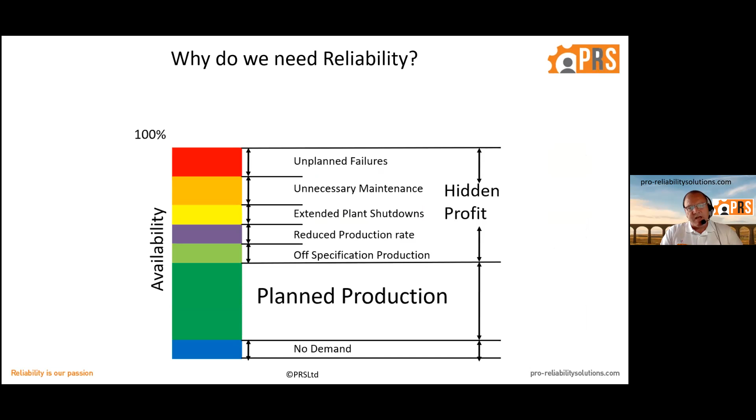So why do we need it? In a 12-month period we have 8,760 hours to maximise our plant availability. And what we're looking at in asset management, focusing on the reliability of the assets, is really digging into what we call the hidden profit. We're trying to maximise availability by minimising the risk of failure. Are we doing maintenance that shouldn't be performed? Are we doing shutdowns that are being extended unnecessarily? Are we having production quality issues? What we're trying to do is really dig into that hidden profit, to optimise the cost and the risk as well.

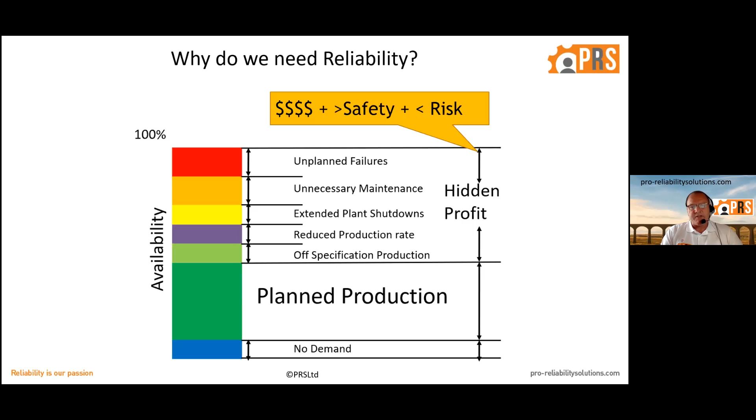And manage the risk associated to the asset. Where does unreliability come from? This comes from a benchmarking study from a number of years ago. Quite often when we're working with customers, reliability is seen as a maintenance activity. But what we're trying to do is understand that some of the issues that we're suffering may actually be inherent within the asset itself.

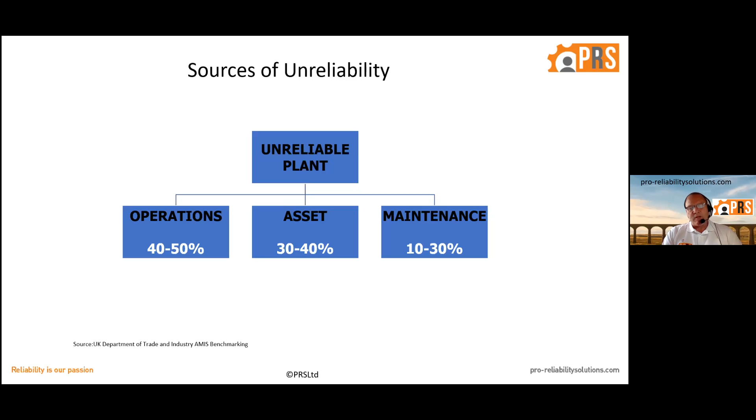And also, how are we operating the assets? Are we operating them within their design envelope? Or are we trying to get a few more thousand widgets per hour out of the machine when it wasn't actually designed to do that? And so you can see the ratios of unreliability there. If we only focused on the maintenance section, we are still going to see some unreliability from the production line. So it's understanding that reliability is not just a maintenance activity.

So what is an asset? People look at assets. It can be a piece of equipment. It can be a copyright. It can be land. It can be buildings, and it really is a thing or an entity that has value. That description comes from ISO 55000, which is an asset management standard. It is understanding what an asset is before we start to do the asset strategy optimization. Generally, we're focusing on the equipment, the production lines, and the machinery inside a company.

So what is the optimization? It really is about balancing the cost against the risk. Looking at the overall asset, the production line, it might be a single piece of equipment, it might be the full factory, and doing a risk analysis and balancing that cost. As we get to the case study, you'll see how that eventually comes out. From ISO 55000, asset management is referred to as the coordinated activity of an organisation to realise value from assets. That's what we're doing with asset strategy optimization, getting the value from the assets and balancing the cost against the risk.

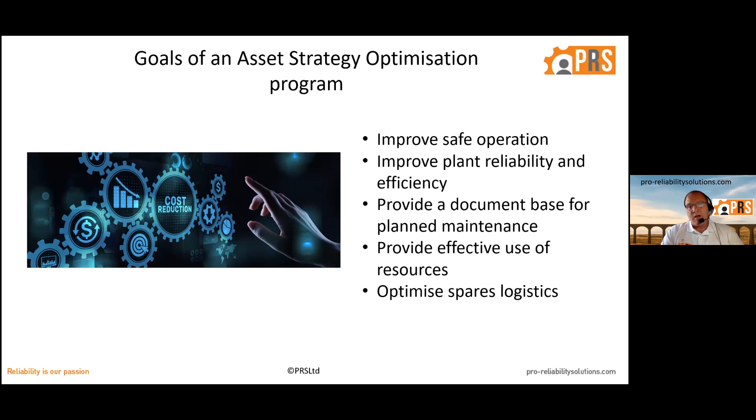So the goals of the programme, there's a number of them that we tend to look at. We certainly need to focus on the safe operation. We need to improve plant reliability and efficiency. The Asset Strategy Optimisation Programme will provide a document base for planned maintenance, and also look at the resources that we're going to need and what spares we need to deliver the strategy. Some customers may have other requirements as well, but generally those are the key ones that we're focusing on.

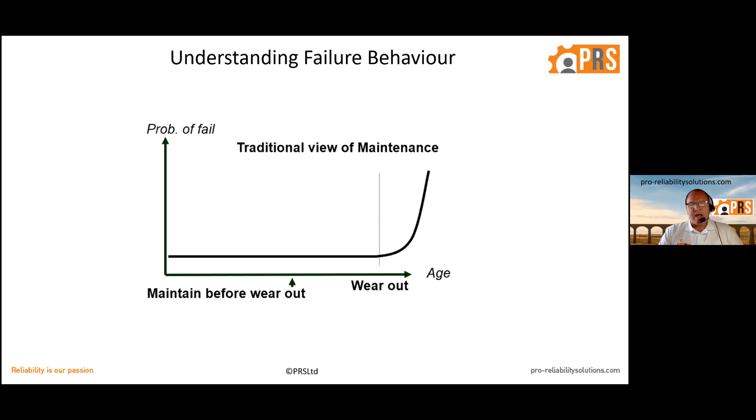As we start to look at the assets, one of the starting points is to understand how the assets are failing and where they fail within their life cycle. A traditional view of maintenance is that we install a piece of equipment at day zero and it runs for a period of time, and at some point in the future it starts to wear out. Providing we do maintenance before it reaches the wear out phase, we should get the maximum life out of the asset. Unfortunately, not all items reach the wear out zone, and we often suffer from infant mortality or early life failures.

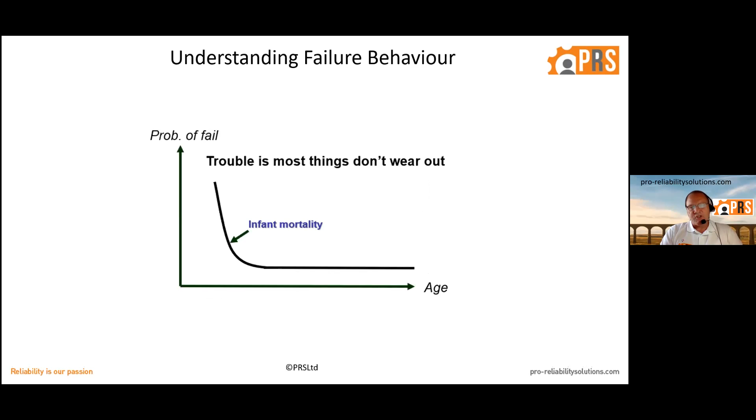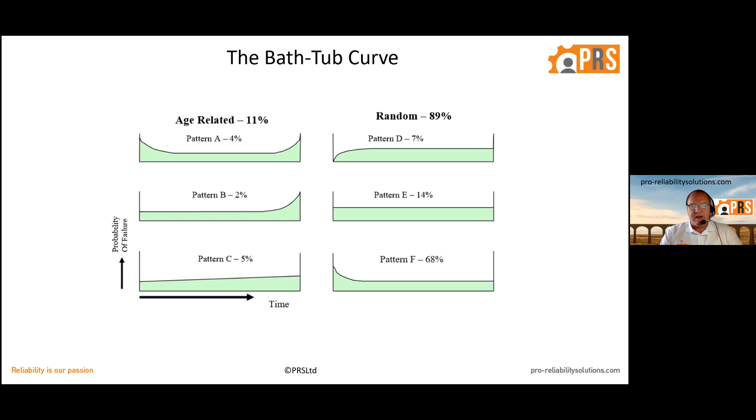So being able to understand how a component inside an asset is failing helps us optimise the overall strategy. If anybody's heard of the bathtub curve and Weibull analysis, this is what I'm referring to here. There are actually 6 zones of the bathtub, and what's important as we're doing the analysis is we look at the failure history, we do the analysis, and, as I'll be showing in a moment, perform Monte Carlo simulation and predict what we're likely to see in the future based on past events, and understand how the components are failing within this bathtub curve.

It really is the attention to detail that's needed. We need to get down to the assets. We need to understand the failure modes and how they are failing. Some of the failure modes will suffer from infant mortality. Some will be random failures. Some will be wear outs. My job as the reliability engineer is to get down to that level of detail, get to the failure modes, and put in place the optimum strategy to prevent or detect a problem occurring. That's the maintenance strategy. We're either trying to prevent the failure or detect it before it happens.

There may be some failures that are left as run to failure or no scheduled maintenance, but for me that decision is only made as part of the asset strategy optimization approach. Ultimately we need to design the maintenance task and align it to the failure mode that we are expecting to see or have already seen in our history files. So it really is attention to detail, getting down to the failure modes and understanding how they fail in terms of the life cycle and the bathtub curve.

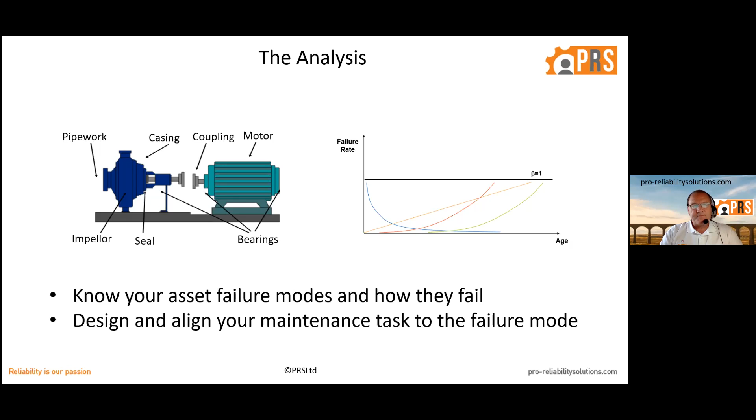If anybody's followed reliability-centered maintenance in the past, RCM, there are a number of different RCM standards. SAE JA1011 defines the process, and there are 7 questions. And if we follow these 7 questions in sequence, then we should be able to determine if a suitable task, or a suitable maintenance task, can actually be applied.

So this is going through looking at the functions of the asset, the functional failures, what are the failure modes, what are the effects upon failure and the consequences, and then what mitigating activities or mitigation tasks can be implemented and how frequent should we implement those tasks. So those 7 questions under the RCM banner help us drive our assets towards a point of optimization.

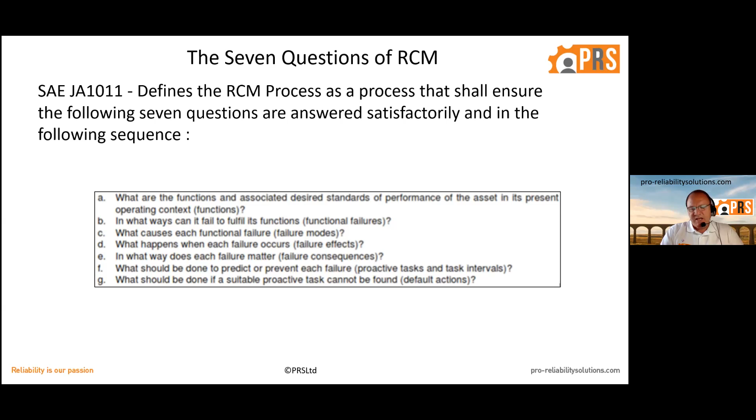What is a failure? Any unplanned interruption to the operating equipment or systems in delivering the desired performance is a failure. And what reliability methods are actually aiming to do is forecast those failures through understanding the likelihood of occurrence over a period of time. So as we get down to the asset, down to the failure mode level, we're really trying to understand how often are we likely to see this failure mode occur over a set period of time, and ultimately what mitigating activities are we going to put in place to prevent those failure modes from occurring.

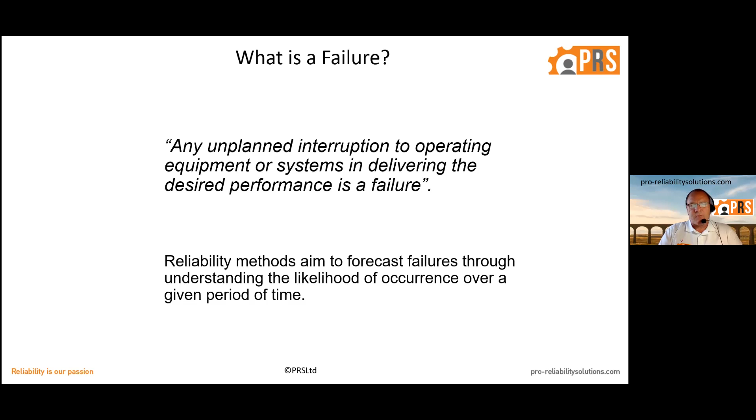So it's a question that we ask customers: how does reliability impact your business? And these are generally the responses that we get. We can look at higher maintenance costs. We can look at lower plant availability. We can see an increase in reactive or breakdown maintenance, and that is often related as well to an increase in safety incidents. We can look at quality non-conformances and an increase in capital spend. So those are often the 6 common answers that we get when we ask that question, how does reliability impact your business?

And so with this asset strategy optimization approach, by taking a structured approach, what we are looking to do is actually flip these on their head and really get hold of the strategy and the costs and the risks associated to any potential failures.

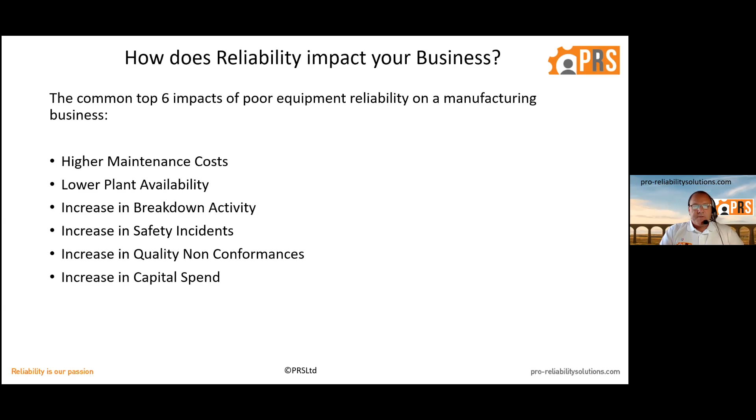So one of the steps that we look at with customers is, have we done a criticality analysis? Where are we going to focus our effort? And criticality analysis is really about understanding where are the most critical down to the least critical assets within the business. Some of you may have already done this. We have customers who've got well-documented criticality analysis programs in place. We have others that have not yet done it.

And so it's something that we try to help guide the customer, because we don't want to be putting all of our effort into some of the assets that aren't having an impact on the business in terms of the cost and the risk. So let's focus on the things that are going to hurt us the most, and define a program for applying the asset strategy optimization.

So some of the things that the criticality analysis often covers are the customer impact, the safety, risk, impact on production. Have we got any single points of failure within the production line? What's the history telling us on this particular asset? Do we carry spare parts? And we look at probability of failures. But it helps us understand the asset structure and where are the critical elements within our business.

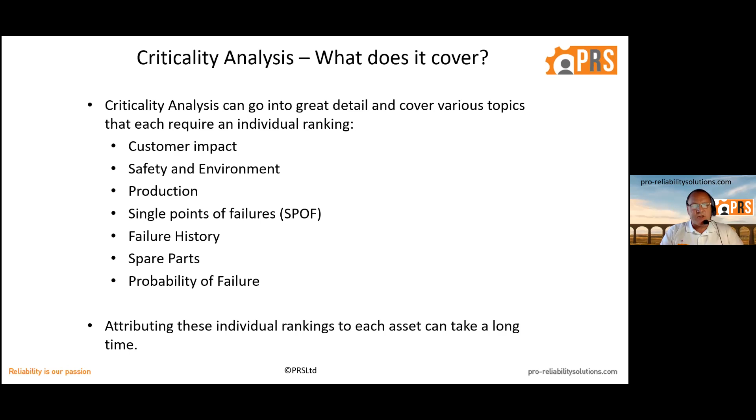So having that critical list, the output is often an ABC type ranking, or it could be a 1 to 5 ranking. There may also be safety critical elements, or in some companies we look at critical control points, where the maintenance is really non-negotiable. It might even be mandatory activities that we have to perform, and they will just come out at the top of the tree anyway through the criticality analysis.

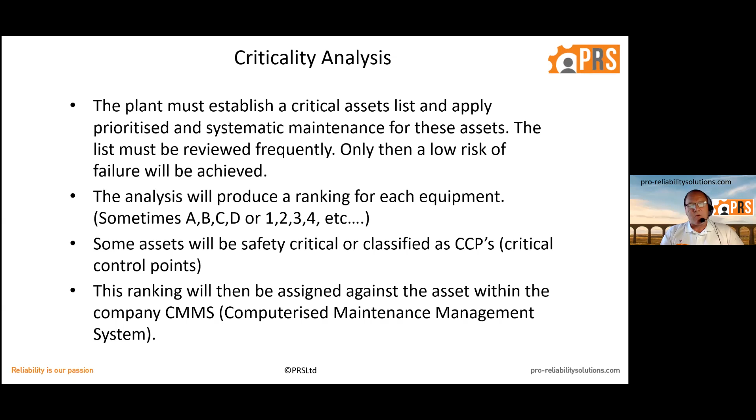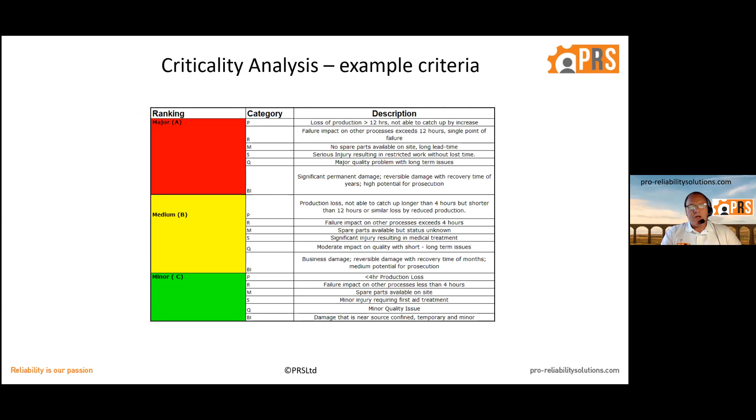And once those criticalities have been identified, then we look to ensure that those criticalities are assigned against the asset within the CMMS system. There's a simple ranking there of an ABC, and in each category you can look at impact on production, plant reliability, maintainability, safety, quality and business impact, and we can take those criteria and do a simple analysis, looking at the A's, B's and C's, and then making sure that we focus in a little bit more detail on the criticality A's.

When we do it in this approach, generally what we find is the ABCs, we generally find a split of 20% A's, 40% B's, 40% C's. It's usually that kind of ratio, but again, that varies on the production line, and if you've got duty standby redundancy built in, that can also influence that number. But generally, it's around a 20-40-40 split.

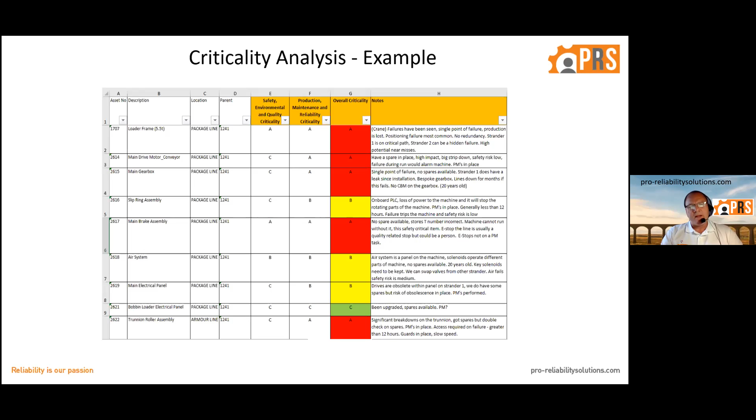What do we do then with that criticality? I've already mentioned we can put the numbers in the CMMS system, and that can also help with the prioritisation of your work orders within planning and scheduling. Some companies use something called a RIME index, where the criticality number is taken into account and helps planning. It can help with your budgeting discussions. It can also help you understand where we need to put our reliability and maintenance efforts.

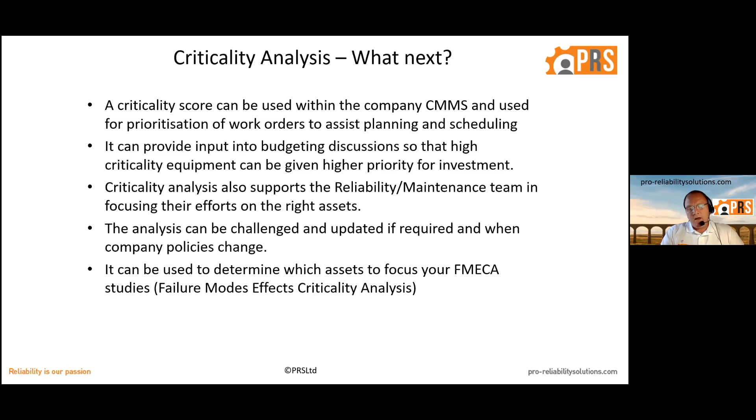And then the next thing down at the bottom there, it talks about which assets are we going to do the asset strategy optimization on and focus the FMECA effort. And that's really where that criticality analysis is leading to now. So we're moving from the high-level asset criticality down to what we call the FMECA, which is a failure modes, effects and criticality analysis. And what we're now going to do is drill down to the asset, identify the failure modes, understand the effects upon failure, and then what can we put in place to mitigate those particular failures. So we're moving down into the FMECA.

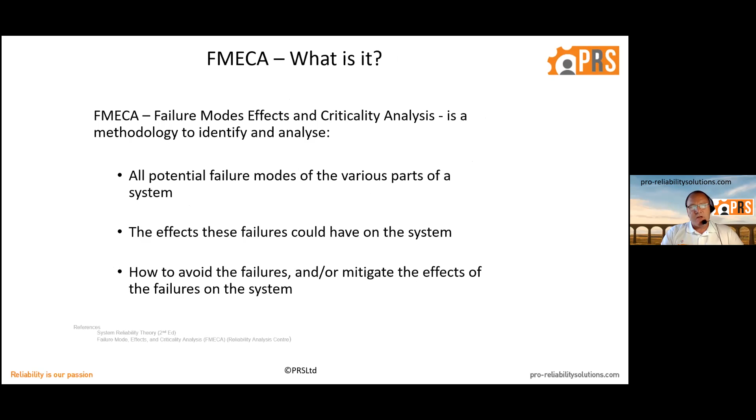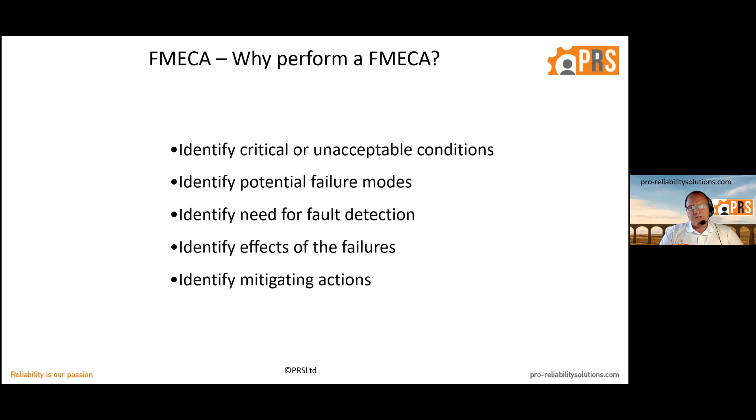And what we're looking to do is identify any critical or unacceptable conditions. I've already mentioned the failure modes that we need to look for, any fault detection capability, the effects and the mitigating actions. That's why we're actually performing this particular FMECA. There are different types of FMECAs that exist. I'm referring to the maintenance FMECA process here, but there are process FMECAs, there are design FMECAs, slightly different variations, but what I'm referring to here is this maintenance FMECA.

So 9 key steps. What system are we going to FMECA, which may have already come from the criticality analysis. Then we have to build the hierarchy, understand what are the assets. Then we go through the functions, functional failures, failure modes and failure effects, understanding what is the impact on the business. Then what we can do is look at the criticality at the lower level. So the criticality analysis previously was at the equipment level. We're now dropping down to the failure mode level and looking at which failure modes are having the biggest impact in terms of cost and risk.

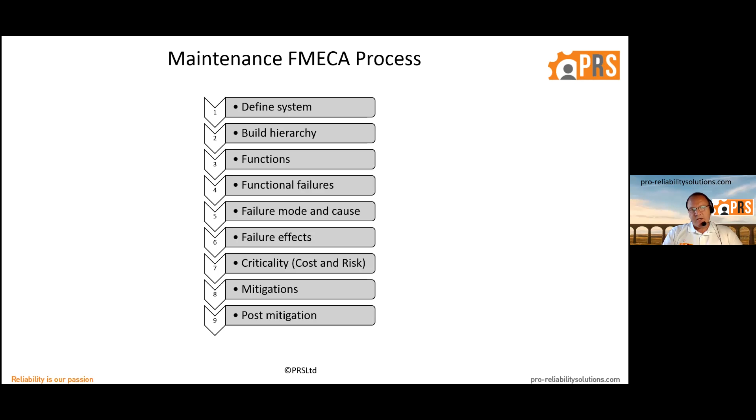And it's those failure modes that we need to be able to mitigate against, hopefully through maintenance, but not always necessarily maintenance. It may be a redesign requirement on the assets that's needed. And then we can, if we need to, go back and look at, right, now we've applied these mitigations, have we been able to lower the risk? And that's what I'll show you as we move into the case study.

One benefit that we do have is the asset strategy FMECA libraries. So do we need to start from scratch every time we build a FMECA? We can have access to generic libraries. So we've got a number of libraries available to us with quite a number of different asset types from industry, with failure modes and documented maintenance tasks. That can be used as a first pass entry to building a FMECA to help speed up the FMECA process. Because it can be time consuming, but we've got one foot on the ground and we're starting to run when we're basing ourselves on the FMECA library. But we do have customers as well that build their own libraries.

I'm just currently working with a customer in the UK. They've got a number of food and beverage sites and they're looking to standardise their maintenance programme. And what they are doing is building a library that is personal to them, and they'll keep that on their own system, and everybody will be compared against that strategy library.

But we all know generic strategies. Some people call it maintenance templating. A centrifugal pump is a centrifugal pump, except when it's not, and we always still have to take into account the operating context. And some of the failure rates, some of the failure modes may not be applicable, some of the tasks may not be, but it is a starting point and it gets us on the journey.

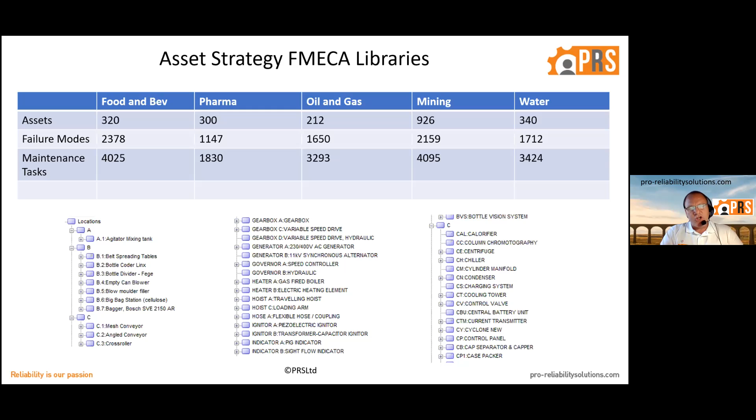So moving towards the case study. As we've worked through the presentation, that introduction to reliability and asset management, and now we talk about asset strategy optimization, working in towards the criticality, and then working towards the FMECAs. And this is really how this case study came about. Some of you may know this piece of equipment, it's known as a Nutsche filter, a solids liquid separation filter.

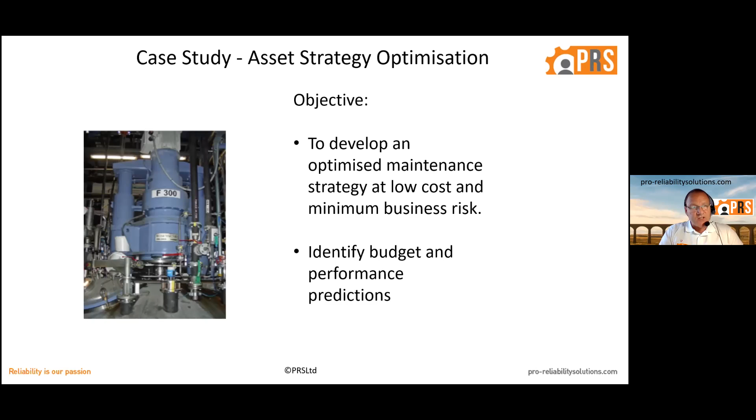And this was actually a study that I facilitated over in Switzerland a few years ago. The objective for this study was to develop an optimised maintenance strategy at low cost and minimum business risk, and also identify budget and performance predictions. So we knew this was the asset, we knew this was the critical piece of equipment, and we then went through the process.

So we built an asset reliability model, and we used some reliability modelling software. I'll mention the name in a moment. We then built the FMECA within that model against the asset. Step 3, we validate the data inputs, and that's the effects, the consequences, proposed maintenance tasks, and even current maintenance tasks as well. Then we run a simulation of all the failure modes.

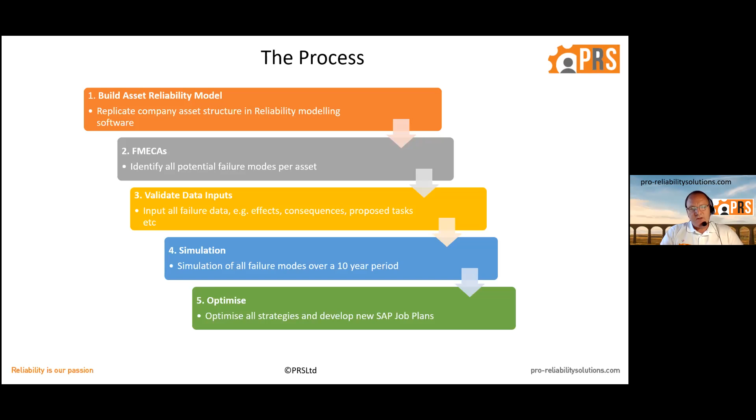So we run a Monte Carlo simulation, and then we identify where are the risks, high costs, and that's where we focus on the optimization. And then that's where we're able to develop new maintenance job plans for uploading to the CMMS system. This site had SAP. So we go through that process.

So that's step 1. This is the hierarchy over on the left of the assets. It replicates the hierarchy that was in SAP. You'll see that some of that is in French. Then what we did down at the asset level is we start to do the functions, the functional failures, the failure modes. And at the failure mode level, that's where we start with step 3, and we're working through validating the data.

You might be able to see the tabs on that step 3: the effects, the failure rates, the maintenance activities. We can also take into account any alarms that may be early warning alarms for the onset of issues or failures. There's a commissioning tab, a redesign. So if we identify failure modes that are giving us high consequence or high impact, and maintenance can't actually mitigate against that failure mode, then we might have to do some redesign.

So not only can we capture the mechanical and the electrical type failures, we can also look at operational type stoppages as well. I know in food and beverage, we often come across what we call the high frequency, short duration stoppages, and we can model those as well. And those are the things that we really need to focus on to maximise the availability of the asset.

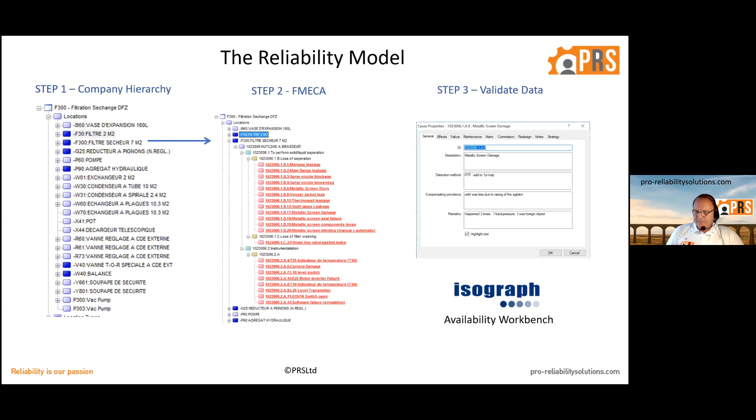You can just see that logo down in the bottom. This package that we use at PRS is called Isograph's Availability Workbench. I first started using that back in 2001 when I was a reliability engineer with Shell in New Zealand. Isograph are headquartered out of the UK, but it is a nice neat package that we use to help optimise the asset strategies. So that's the first three steps.

Step 4, once the model's complete, then we want to run the Monte Carlo simulator. And again, this ran over a period of 10 years. A Monte Carlo simulator is a random number generator built inside the software. And what that allows us to do is look at where are the high impact problems.

And we can look at those issues from an operational and a quality perspective. We can look at it from safety and environment, and then we can look at the cost as well. So we can look at the high cost failure modes. And what we need to do is compare that with current practice as well.

So, and I'll show you a results slide in a moment. So again, not wanting to reinvent the wheel, when we're working on existing equipment that has already got a documented maintenance strategy, that's the starting point. Let's work with what we've currently got, use the failure history that we've got, and start to build the model. So once we've built current practice, we can validate that data with what we have been seeing, and then we look at the optimization of the current strategy.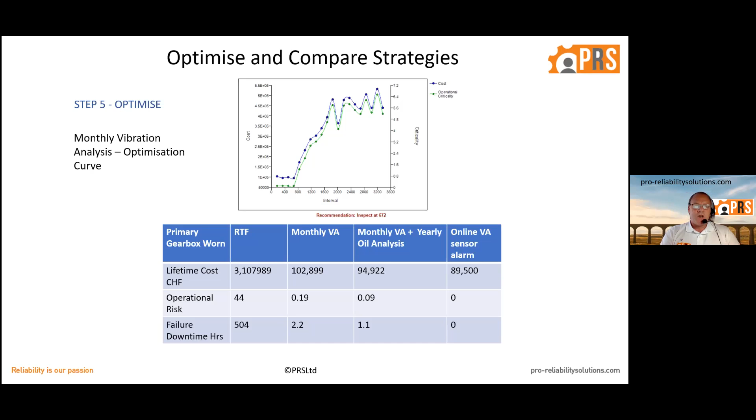This example here is just showing one of the primary gearbox failure modes, where we compared run to failure with monthly vibration. Then we had monthly vibration checks with yearly oil analysis. And then we looked at the opportunity of having an online vibration sensor alarm. And we compared the life cycle costs over 10 years as to what that particular activity would deliver. We can also see the operational risk has decreased as we've changed the strategy, and also the amount of failure downtime has also decreased as well. So it allows you to, like I said, get the attention to detail, you can look at the things that are hurting you, and you can start to do a level of optimization to produce a new documented strategy. So that's step 5.

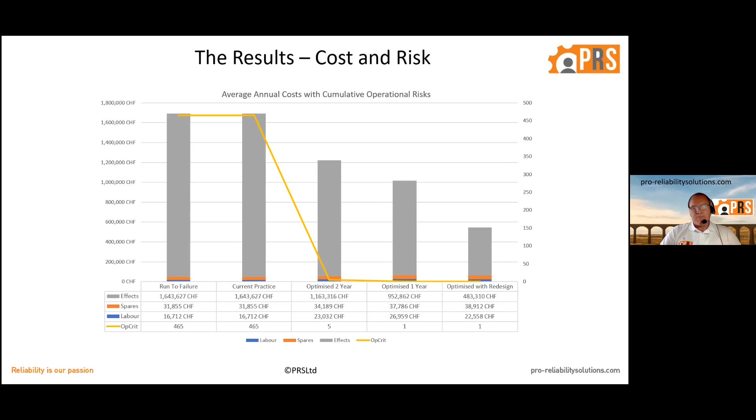And interestingly, on there you can see the operational criticality. So that's the risk reduction. So we're able to reduce the risk to the business, and the scale on the right hand side is the risk number, and that would have been married up to the company's corporate risk matrix.

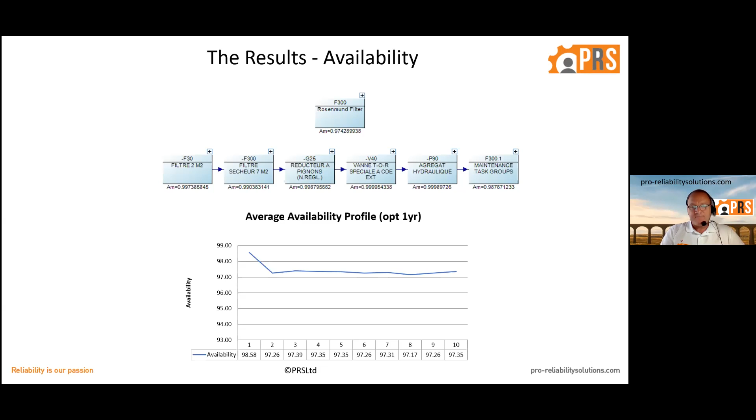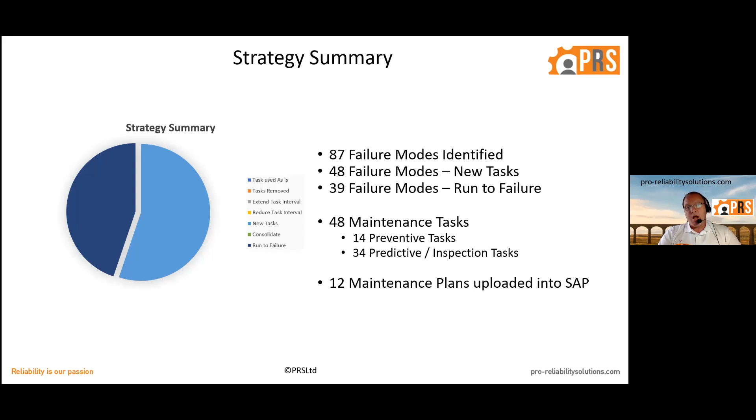The outcome for this particular equipment, we identified 87 failure modes. 48 of the failure modes had new tasks attributed to them. 39 failure modes were left in run to failure, or no scheduled maintenance. And out of the 48 maintenance tasks, 14 were preventive, like fixed time replacement of components, and 34 were predictive/inspection type activities. So that may have been some sort of condition monitoring or visual inspections. And once we created those maintenance tasks, they were developed into 12 maintenance plans and uploaded into SAP.

So to summarise the presentation, we've talked about reliability and asset management, what it is and why we need it. What does asset strategy optimisation deliver when we've got a structured process in place? The importance of understanding failure behaviour and where it fits on that bathtub curve. Are we suffering infant mortality? Are we having random events? Are things wearing out? And the maintenance tasks then get aligned to the failure modes. And then understanding reliability and how it impacts the business, and what can take place when we're not focusing on plant reliability.

Talked about criticality analysis at the asset level. I talked about ABC, or you can do 1, 2, 3, 4, 5, or you can have risk priority numbers. But having a structured criticality process in place, we can then drop down into the FMECAs, and start looking at the hierarchy and working through the functions, functional failures, failure modes, as I've just shown you in the case study. And also the benefit of using asset strategy libraries to kickstart the program. And if you needed to develop your own internal library, that also adds value within a business.